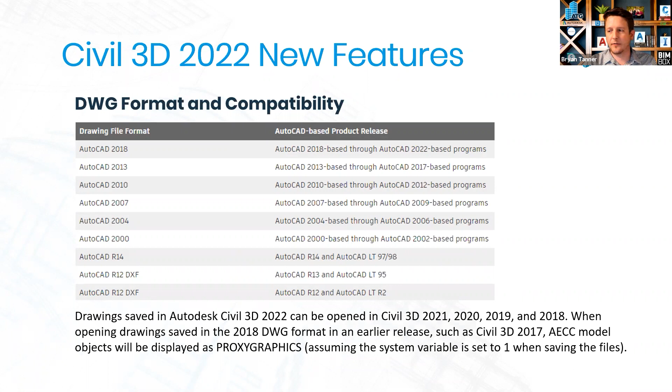We do have some additional sharing and collaboration options in 2022. I've already used this with a few clients, and it's not something that I expected to be a huge win, but it really is. I'm a big fan of the eTransmit tool to make sure that all of our reference objects, all of our CTB files, PC3 files, X references, custom line types, etc., are included with the drawing file that I send to a client or that they send to me.

Well, we have a new tool in Civil 3D 2022. Quite frankly, it's available to anybody on the 2022 platform for AutoCAD and any of the AutoCAD verticals such as Civil 3D, but it's the shared drawing option. The shared drawing option allows us to effectively create a web link for our drawing and set the permissions to that link to make it either a viewable drawing on the web version of AutoCAD Online or an editable drawing that can be downloaded and modified. So we have some permissions control and management over those links that we send to folks and their ability to either view or edit those drawing files.

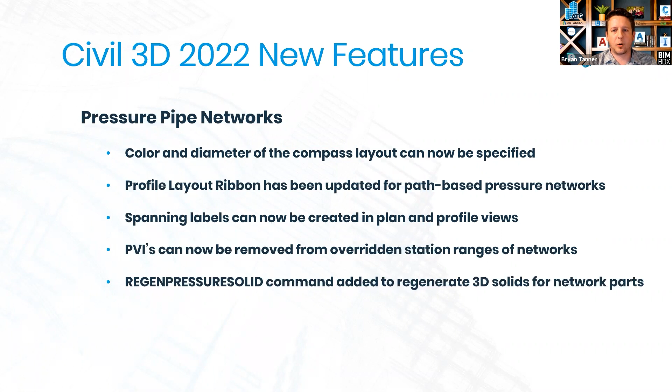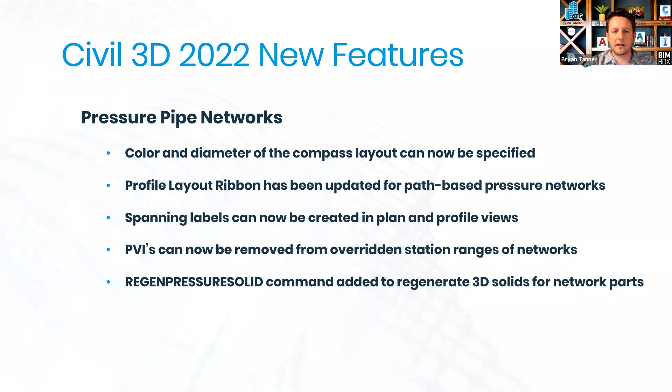And then if we needed to regenerate 3D solids, again, Autodesk is smart in knowing that we're not always going to use Civil 3D for everything that we do. We use other rendering tools. We may use other CAD packages for collaboration with other teams or sub-consultants. So we have a new command available to us for pressure pipe tools to regenerate the 3D solids that were created from those network parts.

ArcGIS workflows, raster data has been improved. ArcGIS can now be refreshed from within ArcGIS, meaning that if you have ArcGIS data connection layers inside of Civil 3D, since it's a live connection, if somebody's in ArcGIS desktop, they can update it from that location. It will refresh in your Map 3D, your Civil 3D environment.

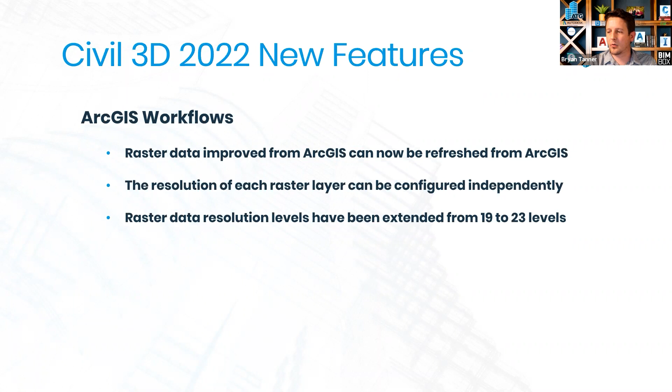Resolution of each raster layer can now be configured independently. It used to be that they were all at the same resolution simultaneously as you zoomed in, zoomed out, and set those layers. But we now have independent control of those and some additional layers of resolution that can be set as you zoom in and zoom out. I know those who work with very, very large models and comprehensive GIS data appreciate the added level of detail that they can create at closer zoom levels and the more minimalized level of detail as they zoom out across those sets of resolutions.

Dynamo for Civil 3D, this is an area that I've been getting pretty passionate about. Been doing a lot of research on and flexing the API calls and what we can do inside of Dynamo for Civil 3D. It used to have to be a separate install as part of Civil 3D, but now it is integrated. So when you install Civil 3D, it's not an extension, it's not a separate third program that you have to download and install. It is installed with Civil 3D. So all of your users are going to have access to it.

All of your users need to be aware of what to do and what not to do with Dynamo for Civil 3D. It's a great tool to flex and leverage the comprehensive programmatic abilities of. It can and will offset some of the things that we do with Lisp, negate what we've historically had to use .NET and Python for, and make it much easier for us to create those comprehensive programmatic experiences inside of Civil 3D, automating many of our processes.

But it now supports Python 3 as a default. So for those of us who do understand programming languages and do add some additional detail in our Python nodes within the Dynamo script, Python 3 is the default. That's important to know because the new version of this Python language, Python 3, is not compatible with the language structure of Python 2 and the variations of Python 2.

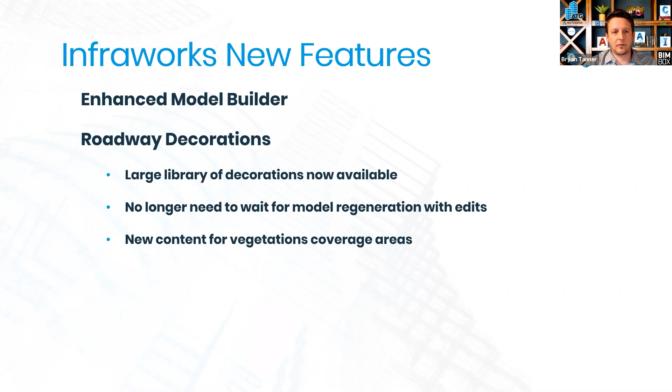So let's jump into a demonstration. We're about 20 minutes into our time together, and I tried to reserve as much of this as I could for looking at some of these tools. There's no way that we could get to all of them, but we're going to get to as many as we can. There we go. Okay, so first and foremost, we're going to look at our connected alignment and some of the new tools that are available there. Again, we're not going to get to everything, and I apologize for that.

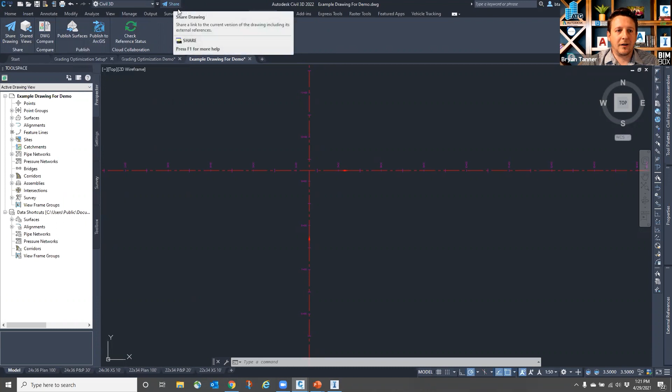Actually, I'm going to take one quick step back before we do the connected alignments. I did want to identify before I forgot the sharing tools. Right up next to our quick access bar, we do have a share button. Before in the slides, you saw where I went to the collaborate tab and we have the share drawing button there. But Autodesk thinks that this tool is so great and people are going to use it so frequently, they went ahead and put it next to the quick access bar. And I can't disagree with them. I think this is something that we are going to use fairly regularly. So having it prominently displayed is helpful.

If this drawing was something that I wanted to share with others that I'm collaborating with, again, this would be outside your organization. This would be outside of using our Autodesk BIM Collaborate, what we used to know as BIM 360. So if you're collaborating through there, great, keep doing what you're doing there. The DWG file format is now supported in BIM Collaborate Pro, and you're able to do some online web-based collaboration that way now compared to previous releases. So keep that in mind. You still have those tools available to you as well as some new features.

But for those who aren't on those specific collaboration tools as a file management, project management resource, we can share a drawing. It's going to generate a link, and you'll see once it loads my options that this link will actually update depending on whether I generate this as a view-only drawing or allow somebody to edit and save a copy of this drawing. So I can simply switch it to edit and save a copy, copy the link, drop it in an email, drop it in Slack or Zoom chat or whatever resource you're using to communicate with your clients or collaborators, and they'll be able to open this up in the web-based version of AutoCAD. Now, note that it's including those dependencies on the drawing, and also that the link expires within 7 days.

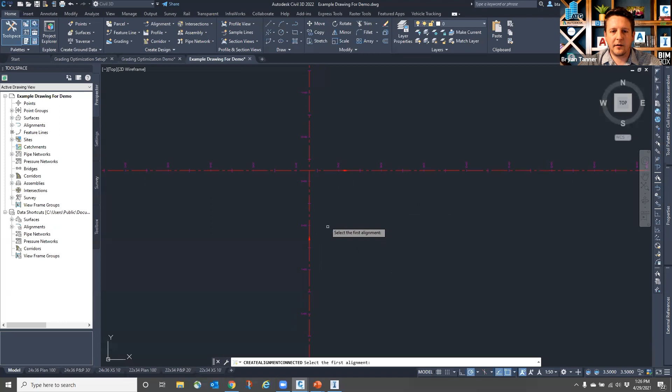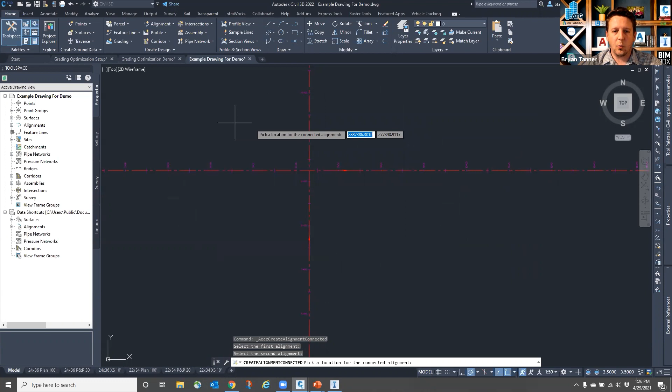So whenever I'm prompted at the command line to select my first alignment, if I am creating a ramp in the second quadrant or the southeast quadrant, I will want to select the direction of traffic that I'm wanting to support. So from my south to north line to my west to east line would be my exit ramp from the south to north line to east and west. And I will pick a location within that quadrant because again, Civil 3D doesn't assume where it's creating this connected alignment.

Now we get that preview area. I want to accept the current location and hit enter. And then I get to name that connected alignment. I'm just going to call this Southwest for the time being, Southwest slip.

I'm going to leave everything else really to the default on this page. It's just identifying the styles. We can talk about styles in any other webinar. Today's about features, not styles.

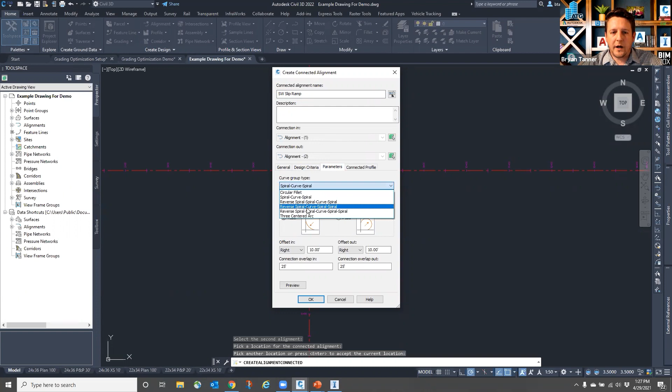Design criteria, again, same as what we've been used to inside of Civil 3D for a while, but parameters are where things have changed. So what is our grouping? We have some reverse spiral, curve spiral, and spiral, curve, spiral, some new groupings that just didn't exist before.

I'm going to use a basic spiral, curve, spiral in this particular instance. Please note that whenever we do the conversion later, we're going to end up with 3 centered arcs. But we'll use spiral, curve, spiral.

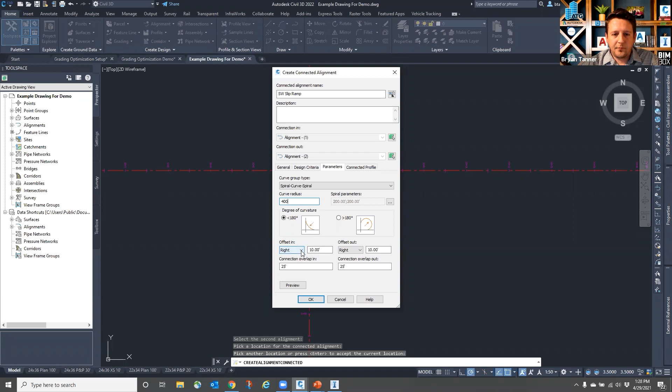I'll define the radius. Looks fine to me. I could easily expand it though if need be, because I'm going to use, again, a slip style exit ramp. Offset in, offset out, connection overlap. We'll run with that. So there's those offsets that didn't exist before for the slip lane, just to explore some of the tools that didn't exist before.

We do have, again, connected alignments that can be created, or actually I'm going to reverse the direction of that in a different quadrant. We're going to go from our west to east alignment to our south to north alignment.

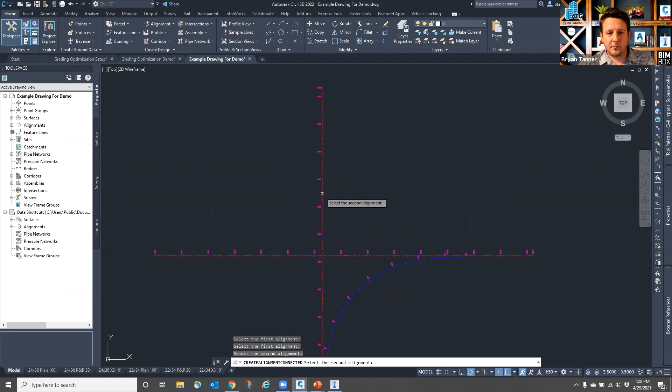Here, I must have clicked on a label instead. So first alignment, second alignment, picking the space, enter, and explore that one tool that didn't exist before, those greater than 180-degree curves included in the connected alignment options.

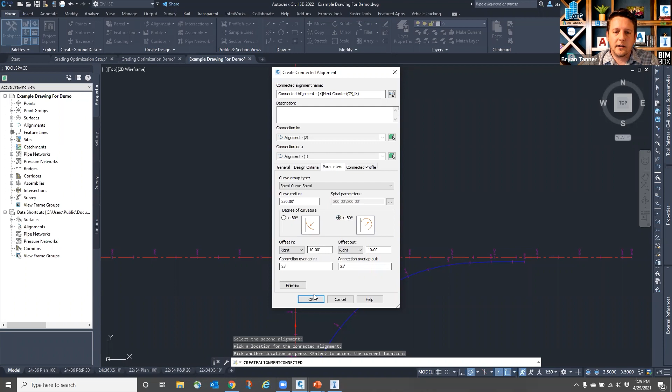Again, going to leave the defaults because this is the new feature, as this greater than 180-degree curve in the connected alignments, with the exception of I clearly should have set my offsets in the opposing direction. Could I make those changes? Absolutely. I could also manually make those changes.

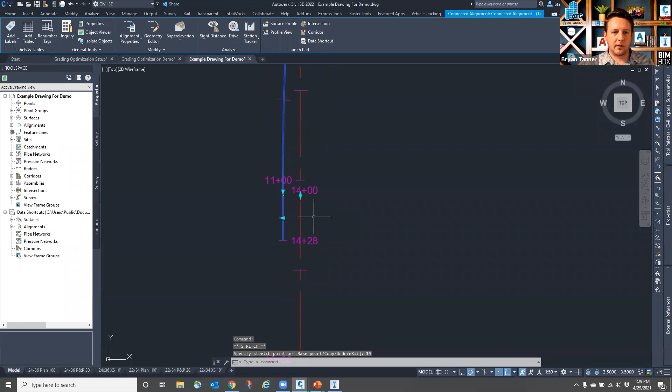I'm going to go negative 10 and just use my grip edits and some tracking to make sure that I end up with, oh, and I got to make sure that I'm opposing. So I've got my cloverleaf ramp effectively being started here.

So depending on how you're creating those connected alignments, we do have some new tools in that connected alignment dialog that didn't exist before. Now, if our curve group is not the appropriate type that was supported in 2020, 2021, or 2019 for that matter, I do need to go to the contextual ribbon, go to the modify dropdown, and use this convert to fixed tool.

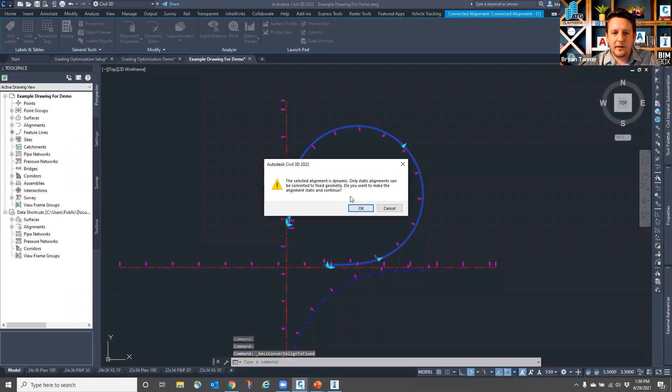That's what I mentioned earlier with the slides. It's going to convert that to fixed. It's no longer going to be dynamic. It will be static, okay.

And there we go. That was enough of a process to where it jogged my windows temporarily. But that is now a fixed alignment. We see that the grips have changed on it slightly. This is a necessary process though, for sharing this back out to folks on an earlier version.

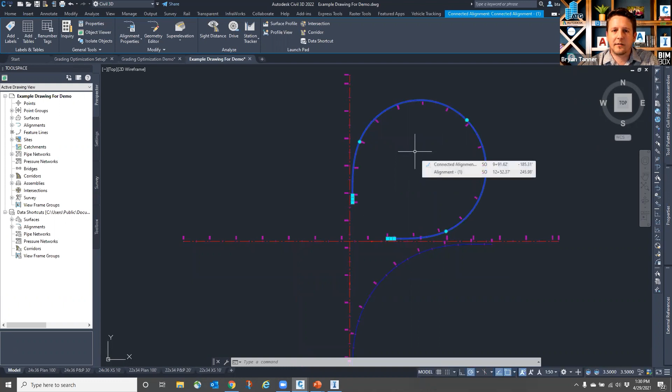So as much as I like this new feature and wouldn't hesitate to use it for internal production, we do need to be cognizant of who we are collaborating with and changes that need to be made in that last step. Like anything else with these contextual ribbons, yes, you can select the entity, and yes, you can go to the modify dropdown, or we can always go to the modify tab, select the object type, and we have convert to fixed from our more static or manually create manual contextual ribbon, if you will.

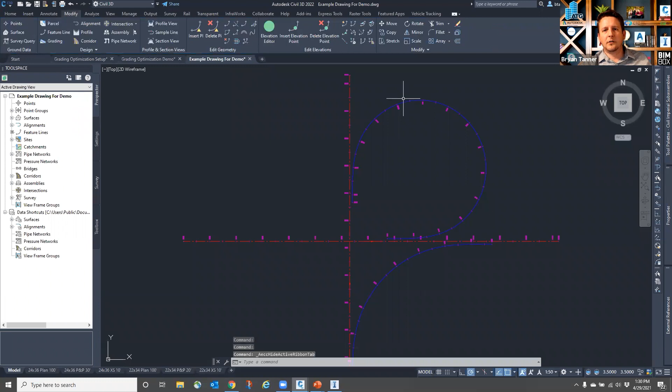So I'm going to close out of there. That's really all I'm going to cover with regard to the alignments. There's a lot of new features. I'm just going to keep moving on.

The one that's going to take us just a little bit to cover in more detail, because I'm not going to go into Project Explorer and heavily detail all of the separate pressure pipe tools. Project Explorer works the way Project Explorer did before. It just has access to additional object types that it did not have access to before.

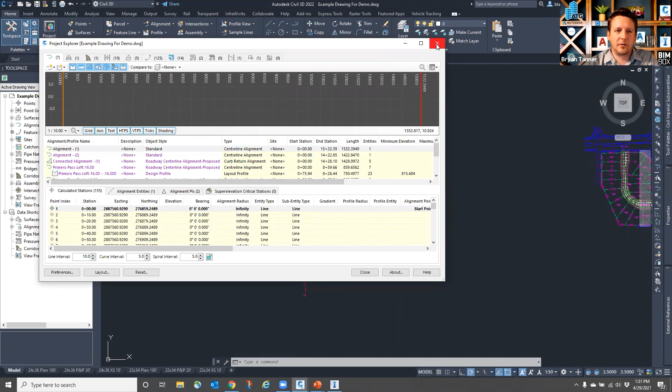So we're going to jump into another drawing. If you've joined our demos before or our webinars before, you're probably somewhat familiar with this data set, but it just so happens that this data set works somewhat well with the new grading optimization tool, and I didn't have to recreate the wheel for some example data to show off these new tools.

If you are using grading optimization, it is a separate download and install. So for those AEC and enterprise customers that have access to this tool, it does not get installed with Civil 3D. It is a separate download that you'll have to install. You can do that either directly through your AutoCAD or your Autodesk account through the web interface or through the desktop app, depending on which you have access to or your organization prefers to utilize.

It is available through either of those sources for our AEC collection and enterprise clients.

So what this drawing consists of right now is some very simple data. It happens to be that we are looking at polylines in this drawing. Now whenever we use grading optimization, it's going to convert those polylines to feature lines for us, but we just have general spaces, or what grading optimization calls zones.

Now once you download and install grading optimization, it's going to be on your Analyze tab of the ribbon over here to the far right. Grading optimization - very minimalistic approach to what tools are available here.

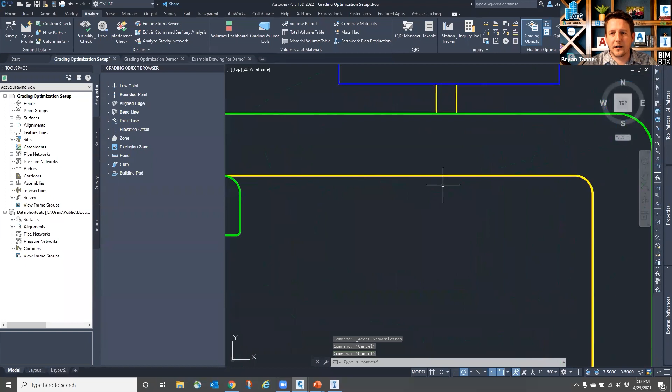First thing I'm going to select, I'm going to zoom in a little bit. This is our parking lot area represented by this pink line. I'm going to select that, go to my tool palette, and consider that to be a parking lot.

There is specifically a zone that we can customize however we want to, but the parking lot object is just a special type of zone. So I'm going to choose parking lot.

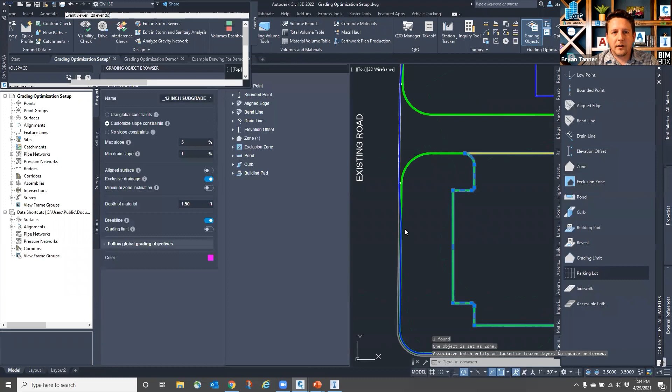I'm going to get rid of the event viewer really quick. I know some of us love it, some of us hate it. I generally don't like it as part of demonstrations, so I'm going to go to general event viewer and set that to no - so no more pop-ups while we're working with these tools.

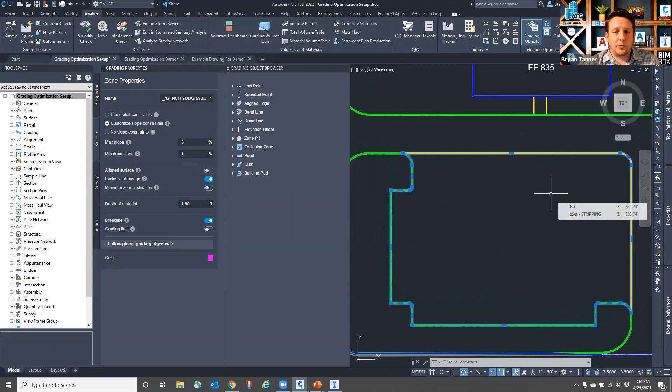So I've got my parking lot polyline selected. There's no depths, there's no elevations, there's no intelligence to this. I just have an existing surface and I have the horizontal representation of where my objects need to be.

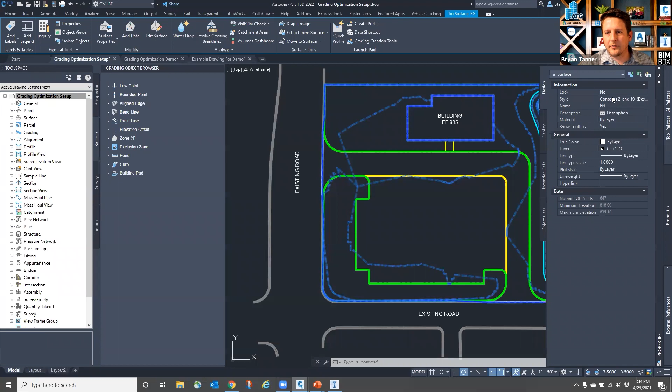As a matter of fact, I do have a design surface in here that is currently shown. This is a little bit of Food Network magic, but not a whole lot. I'm going to turn that FG surface to no display, and I'm going to go back and turn my EG surface to on, so that we can in fact see it.

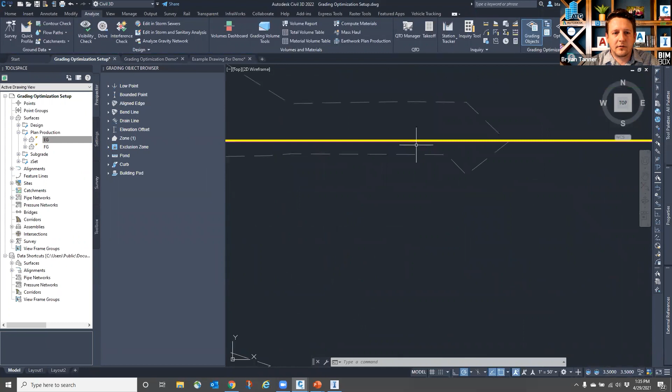Okay, so there's my existing surface. That's the only pieces of information that the grading optimizer is actually paying attention to - the areas that our polylines represent for those grading objects, and the existing surface that it's going to be converting and calculating the earthwork against.

So there's my zone that I created for that zone - there it is, max slope. I'm going to say I don't want my parking lot to be anything more than 3% and nothing less than 0.5%. I do want it to have exclusive drainage, so any drainage that's in the parking lot stays inside the parking lot.

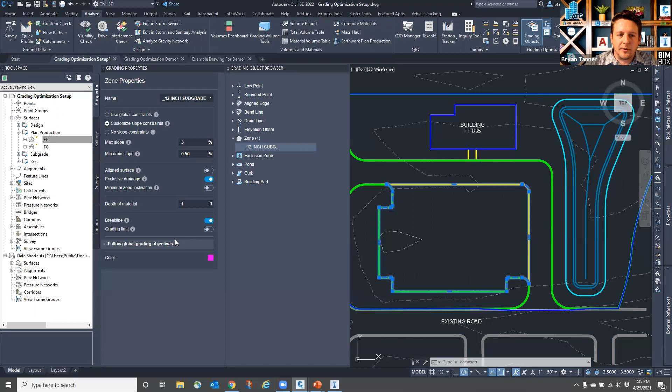And define a material depth and what have you. So I would hit escape to deselect that item, and then the zone properties goes away. So that object that was a polyline is now a polyline with extended data tied to it.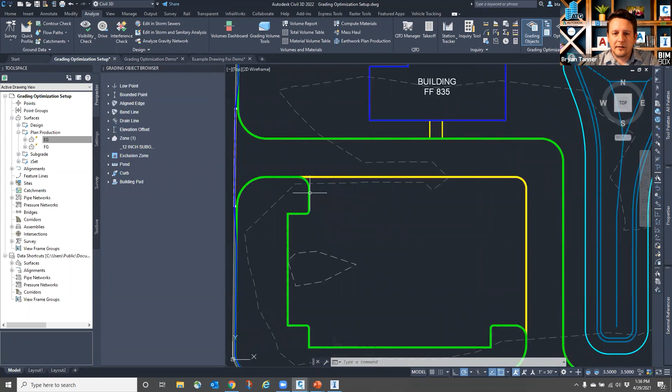Okay, so we haven't used the grading optimizer yet - we're just assigning extended data to our polyline reference objects. So I'm going to select - oh, I didn't mean to put a window around our pink line too - but here's our objects. We can only do this to one object at a time, one limit at a time.

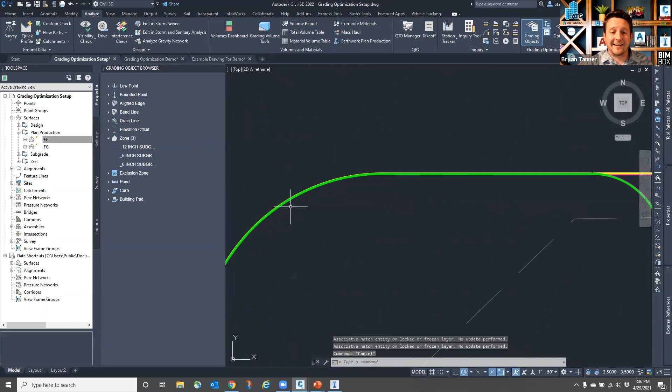So if I do select multiple polylines that represent the same type of material, and I set that up as a zone, it's not selecting anything until I hit escape, and then I pick back on it. It converted it to a zone, but whenever I select on it again, I'm only going to edit that one object independently of each other. So I can customize my grading controls - I can set it up with a specific grading criteria.

Within my swale area or just my grassy right-of-way area, I can define a much greater slope, maybe 8.3% within that area, with a minimum drainage of 2%, just so we don't get ponding.

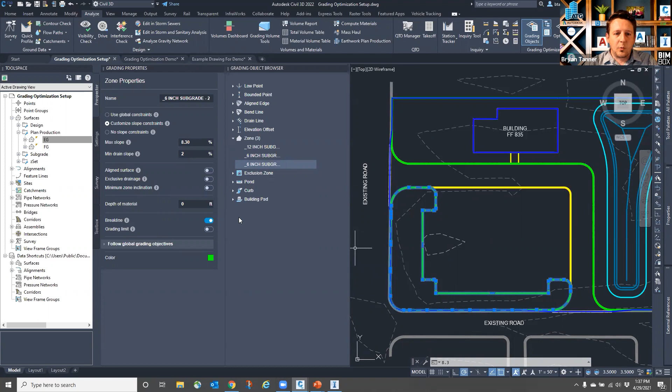So I can go through and set up all of these options within these sites. We have a building pad type. I can go to tool palettes and set up the building pad.

I have a separate pond that's internal to our grading limits, but I have a pond type that I can define based off of the top of slope of this pond, and I can determine whether it's a dry pond or a wet pond. Depending on that, we have permanent pool settings for those wet pond parameters as well.

But we can define what our storage is. A question came up on Tuesday when Autodesk had a webinar on whether the cubic foot setting could be used as a cubic yard setting for storage volume. At this time, that is not an option. So just to get ahead of any question related to that, right now we are limited to cubic feet for our calculation of storage, if that's a concern of anybody's.

But I can set what that storage needs to be. I'll say 60,000 cubic feet with a maximum depth of 6 feet. I do have the ability to set a safety bench and to determine what those values are for the depth, as well as freeboard and things of that nature as well.

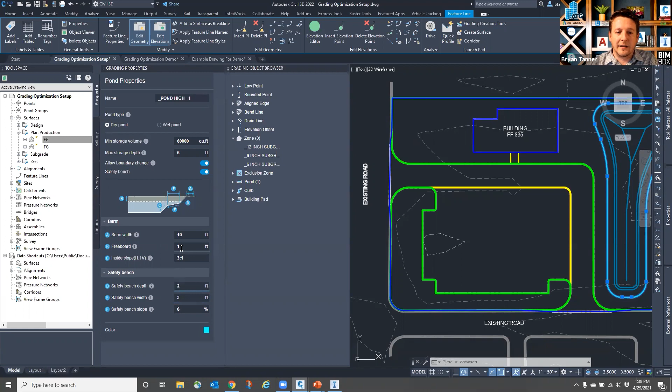So we get some exhaustive rules that we can define for the pond itself. I'm going to say the safety bench width needs to be 3 feet wide and no more than 2 feet deep, and again, that's 2 feet below the freeboard. Then those are the properties that are set for the pond.

We could go through and add curbs, we can add flow lines. Again, being conscious of time, I did preset some of that data into a separate file. No Food Network magic if I can manage, but I did not set my surfaces that I want to be displayed properly in this drawing. So I'm going to go back and set that again really quickly.

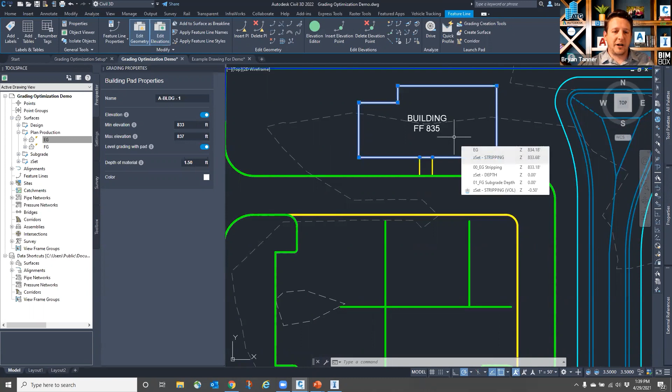Here's my existing surface. In this particular drawing, I'm just going to describe what I did rather than define all of those settings I used before. We have a building with a defined range of minimum and maximum finished floor elevation. This way, if it's possible to gain some benefit of the finished floor changing from the initial design to better engage and level out the entire site, we can do so.

I do have, we can set a sidewalk, I forgot to do that previously, but we've got coverage areas. We have drive areas, again, with different material depths and different minimum and maximum grading parameters.

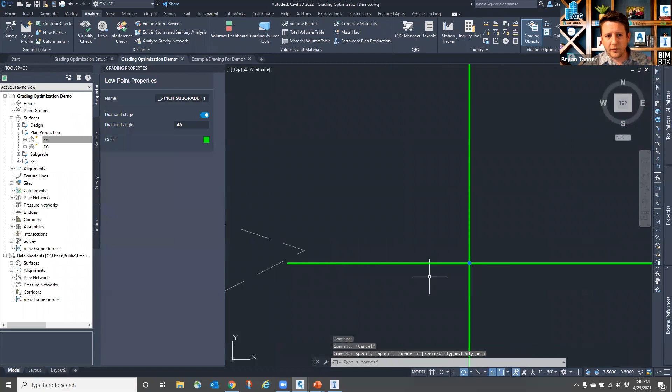I also have some flow lines with some low points that were defined. So I literally just put in an AutoCAD point at the intersection of these flow lines and defined it as a low point. Setting it as a low point, defining the shape of the contours that are ultimately going to be produced off of here, and the angle of that shape allows me to control how my contours are actually developed around those low points within a parking lot or within a ditch, as well as those same parameters I was showing you before with regard to the pond.

So a lot we could talk about this. Easily an entire hour could be dedicated to just the grading optimizer, but the key point is you're defining zones with grading criteria, zones within those, the entire limit of the grading, and then your specific features like your flow line, your low points, and maybe building pads and things of that nature.

Once you are set with the zones that you think you need, and it may change, but the zones that you think you need, within that same Analyze tab, we'll go to Optimize. We'll be prompted to select the existing grade surface that we are comparing against, and the Grading Optimize window comes up on our screen.

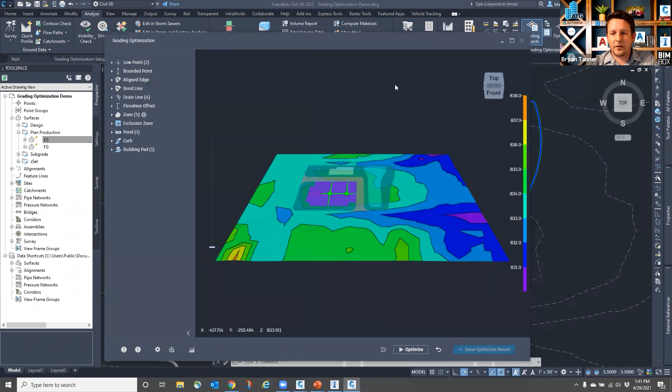So within grading optimization, again, we started out with an existing surface and plan view flat polyline geometry. We get kind of a preview of the different material depths and object types within our grading optimization window here. So we're identifying where a pond will be, a building pad will be, a parking lot, the drive, just the overall kind of site stripping area for our sod work and our low points.

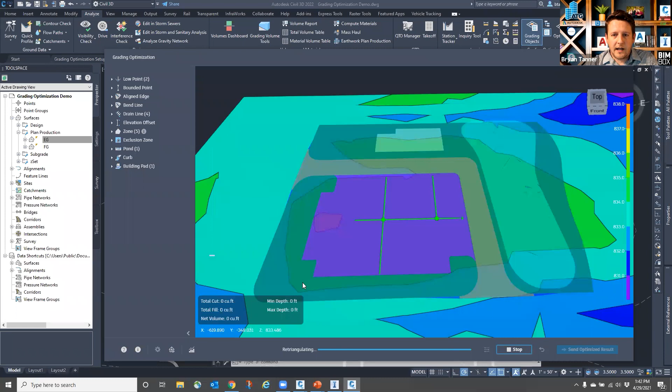That's what we see. They're not CAD objects, they're visualizations of model entities. Now, we can start to optimize at any point in time. And as we optimize, it's going to retriangulate and reprocess everything. And it's going to continue to work and work and work depending on what your CPU and GPU and your RAM and hard drive are all capable of; that is going to determine how fast it can optimize this surface.

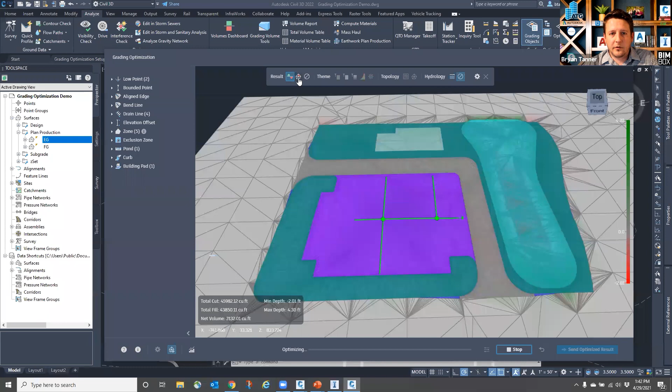I'm going to turn on our visual modes to where we can see where our cuts and fills are, our clashes. So the red triangles represent the areas of our model that do not yet conform to the parameters that we defined. I can set it to none and we can just visually see how the contours are changing as Optimizer is running.

And while you probably can't hear it on your side, this is utilizing a considerable amount of hardware resources, as you might imagine. There are millions of calculations running simultaneously right now to produce this optimization. But if you are leaving for lunch or leaving for the evening, it would be an ideal time to set this up and let it run for a little bit while you're gone.

It can be quick. You can stop at any point in time. And if you're satisfied with the results, it will allow us to send that optimized result at whatever state it's in back to Civil 3D as our, quote unquote, complete framework of feature lines.

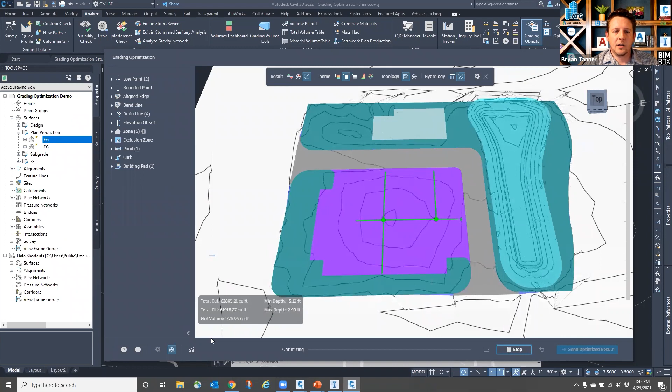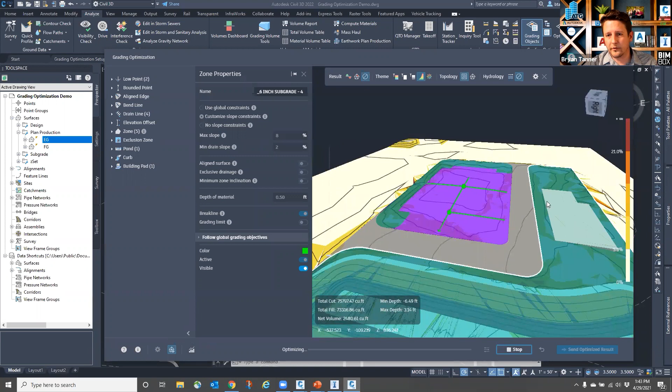Now, we have another tool that we can use. Well, actually, we can use several other visualization tools to see how this impacts our topology and our cut and fill and hydrology. But the one thing aside from visualization that I want you to key in on is our ability to select items that we don't think are adhering to rules. In this case, the building pad. And the controls in here are very familiar for those who are using InfraWorks. So think InfraWorks controls when working in grading optimization.

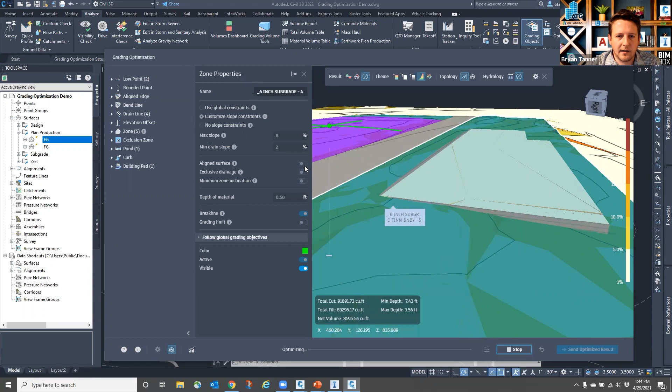Our building pad is not level with the surrounding ground surface. I can change that in here to ensure that it is aligned with my surface. So we have some custom controls that we can apply to allow this to update those new rules. Okay, so we do have the ability to make some minor edits to the rules that are applied to these grading elements, but it's going to continue to run.

And if you want to know how efficient your surface is compared to what you might be trying to do independent of grading optimization, we have convergence plots. So we can see how the overall smoothness, volume, and feasibility of a project is changing over the course of this calculation. The simpler the site, the quicker these calculations run, but also the simpler the site, the easier it probably is for you to make those changes independent of this tool.

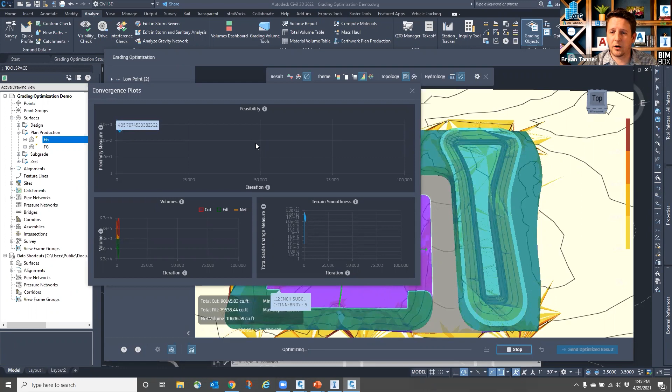So this tool really could be leveraged to great effect on larger sites with multiple components that add a lot of complexity to the incremental changes that you would otherwise have to manually make. Maybe you have 10 building pads, 3 different zones of parking lot, curb and gutter, ADA ramps. We can account for sidewalks and things of that nature, which I did not do in my kind of pre-baked drawing for the sake of time.

But at any point in time, I can say stop. It's optimized enough for me. Send optimized result back to Civil 3D. And I have the option of creating a new surface. I'm just going to call it new from optimization. Define the style that's being used in Civil 3D for that new one. It's probably not going to be pretty because I stopped it fairly early.

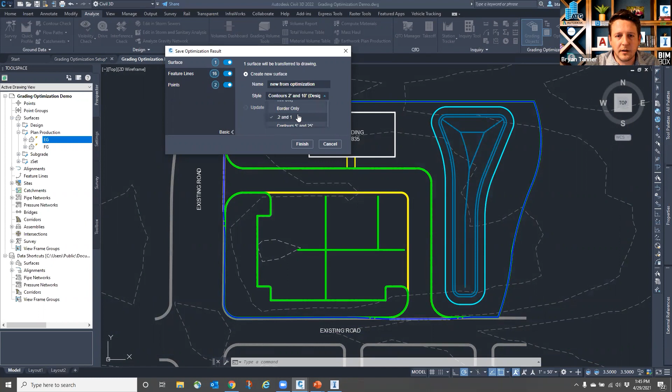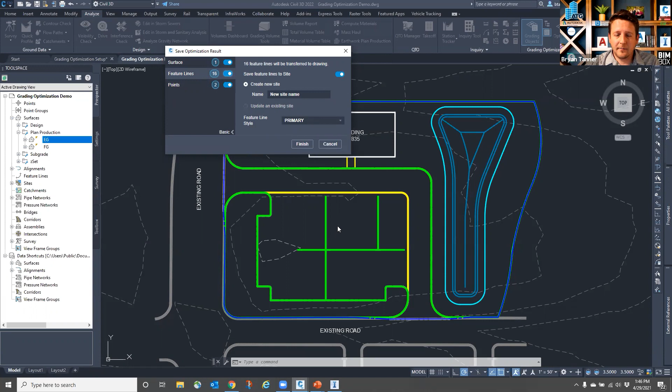Let me change to a smaller one. I'm just going to go with 2 and 1. It's probably not going to look pretty with such small contours, but I am going to add the feature lines back in. We don't have to. It can just be a surface by itself, but I'm going to add the feature lines that were created by grading optimization back into Civil 3D, because the benefit is once those feature lines are back in Civil 3D, they're available, and we can manually tweak and edit them to our heart's content. So we're going to get a new proposed surface.

Again, whether it's pretty or not, I can't validate live without having let grading optimization run to the full extent, but it is a nice tool. It is processing in the background, and it is adding in those feature lines. I may let it run for just a quick second. My fan is still going like a jet in the background right now, whether or not you can hear it.

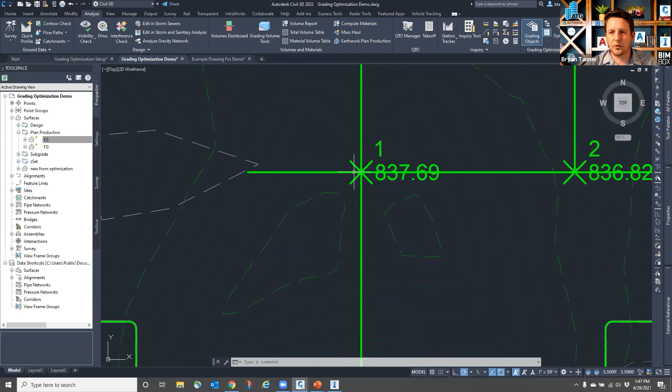But I'm going to let that run for another moment before we switch over to InfraWorks to close out for the day. Again, there are some more features that I couldn't have possibly covered inside the new tools in Civil 3D. So right off the bat, I know that my low points have not been optimized yet to converge on where my actual low point of the surface is yet. Our contouring is not as complete as I'd like it to be, okay?

So we've got some more tools, and actually I never set a grading limit. So it graded for the entire existing surface. And of course, the proposed contours match the existing contours where I did not define any grading criteria. So two steps that I should have taken before jumping into grading optimization. One was adding in my sidewalk. Another was making sure I had a grading limit.

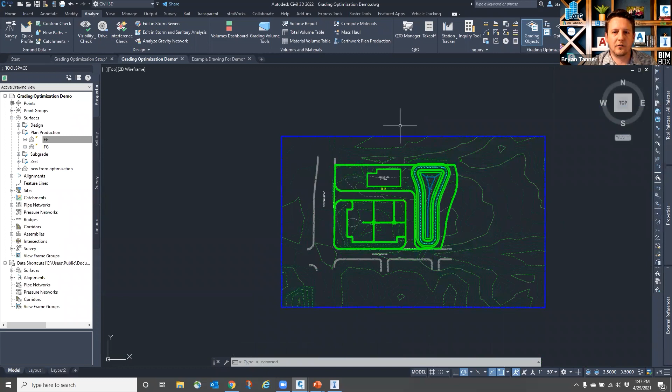Again, that was one of the tools that we had available in here, grading limit, but I did not define it beforehand. And then I could have let grading optimization run for a while longer in the background. Again, the more complex and the larger the drawing, and depending on the limitations of your hardware, this is not a cloud service. This is using your computer's hardware, will determine how long the optimization actually runs to completion.

But again, at any point in time, you can stop it, bring the model data back into Civil 3D, select those feature lines, and modify them to your heart's content. It is just a Civil 3D feature line that we have full control over after it's been inserted back in.

Jennifer asked the question, does it eventually stop running when it thinks it's complete? Yes, there is a point of completion. I will say that I let this run on a different example yesterday evening for about 3 hours and it wasn't done yet. It was a similar size area, but even after 3 hours, it wasn't done.

That's where I say walk away for lunch or leave it running whenever you are done for the day at work. Save it before you leave because like anything else, system-wise, server-wise, otherwise, your best bet is to always save your drawing before you walk away for an extended period of time. But let it run for a few hours. The longer you let it run, the more ideal the design is going to be.

It may look funky from time to time. You may get random spikes as it's calculating all variables, but it will always resolve those and flatten out the earthwork to a more realistic and highly advantageous design as far as the earthwork balances and where the earthwork's moving from. It's not just overall cut and fill, it's mass haul. Where's the earth coming from and moving to, to minimize the overall cost of construction.

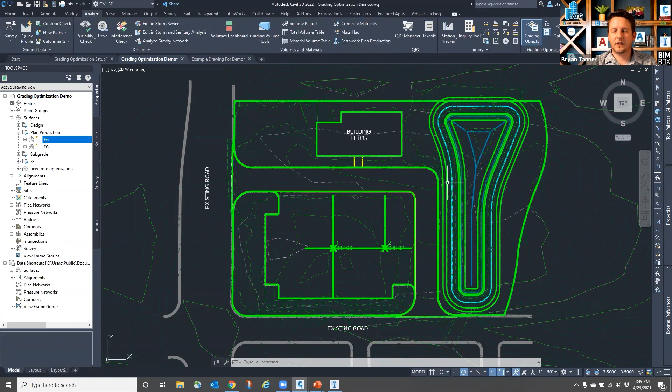Okay, so we do have that proposed surface in here. That's the extent of what I was planning on showing with these tools in Civil 3D today. Be happy to answer any questions that you have as we move forward, but we're nearing 10 minutes or so left of our kind of programmed time together. So I'm jumping over into InfraWorks.

This is just a general highway in northern Indiana, let's call it that. If you're familiar with our region in the state, you might start to pick up on where this is in the world, but that's okay. It's a generic interchange, and that's all we really care about. And it really could be an urban street. It could be a ditch for all I care. We can use some new tools in InfraWorks that were previously unavailable to us and work, in my opinion, much better than what was previously available to us.

The first thing, and I mentioned this in the slides, is our roadway decorations. So first things first, this came from a model. So I let InfraWorks develop this model. And that means that all my roads in here are modeled roads. They are not component roads.

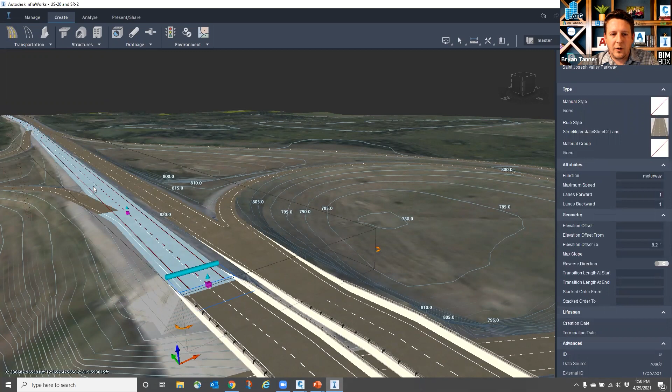So the tools that I'm talking about with relationship to roadway decorations do require that our road itself is converted to a component road. So I'm going to select my road, right click, and convert it to a component road. I'm always going to get the warning that it basically changes how the entire database structures the component road compared to where it was before.

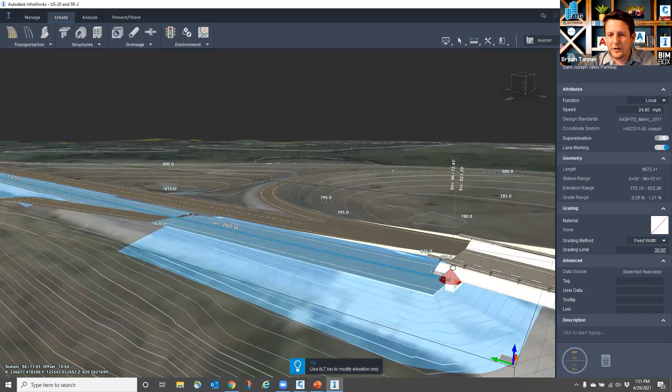Also, whenever we remove it from the model, we do sometimes have to make vertical adjustments to our modeled objects to realign them with some of the modeled geometry that came from our project model. So a couple caveats there whenever we switch to a component road,

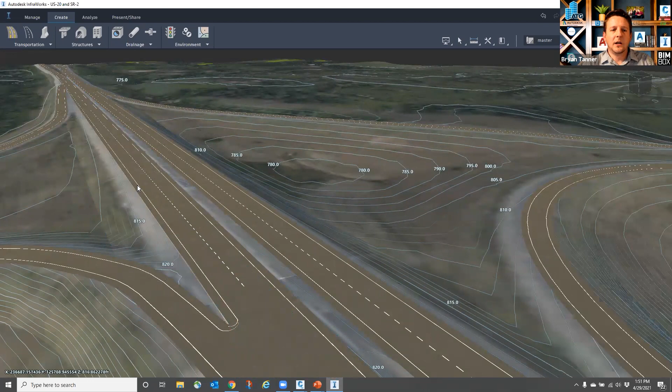but oftentimes we're using these tools for design roads anyway. They're already component roads, whether you're designing them from scratch inside of InfraWorks or they're a connected model coming from Civil 3D. In either case though, now that it's a component road, regardless of how it became a component road, we have the ability to add in roadway decorations as an independent object now.

So if I right click, I have place decorations. Place decorations allows a selection of a fairly large library of available ones. It's limited right now because whenever I was trialing this the last time a few days ago, I looked at rail. But maybe it's some kind of a guard rail or divider or concrete structure that you're trying to place along the edge. I'm just going to use a kind of a common Guardrail 3.

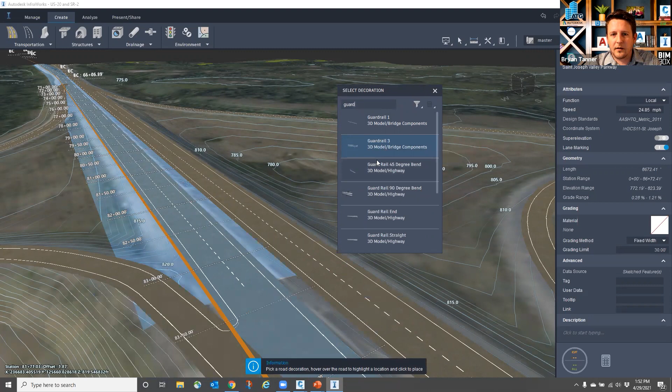And you're going to be prompted for what linear location of your road this guardrail is actually going to be placed. I'm going to place it to the outside edge of my shoulder. It's going to run along the entire length of this component road. It does recognize that you do have intersections, so that is one added benefit. It will recognize some obstructions at those on and off ramps, as we can see here.

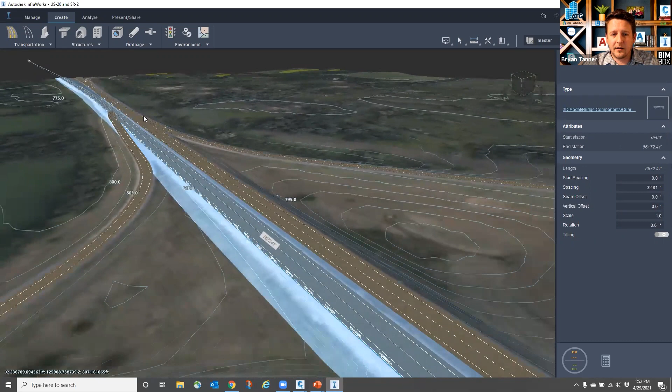So if you did have a guardrail that needed to run the full extent of the alignment, you can probably just leave it at the defaults, but we do have stationing control. I can physically shift the limits of this guardrail and that object updates independently inside the components. Let's pivot around a little bit.

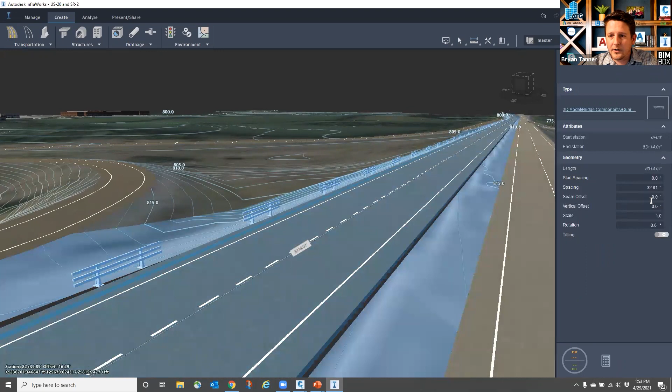Because they're independent objects, we can independently control the spacing. So this thrie guardrail I can change the spacing out. I think this is going to be somewhere around 10 feet, maybe even a little bit tighter. 10 feet is good enough, even if there's just a slight overlap, maybe 13. That looks pretty good. You'll note that it doesn't really have a clean transition from each instance.

I can change to a tilting mode. Tilting mode will heal any vertical difference in here. Note that the change hasn't happened yet. I was given a tip. It just went away, but I was given a tip at the bottom of my screen that if I just click away or hit escape, that model component is going to rebuild.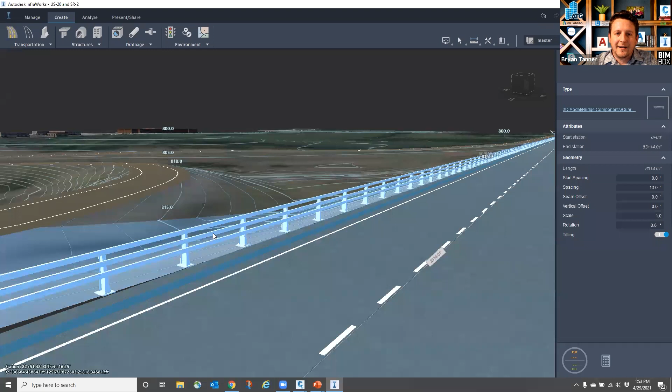So previously, whenever we did roadway decorations, it required us to regenerate the entire roadway that that decoration was based off of. Now it's live. It updates automatically just by clicking away in the screen. Now, if our guardrail is too tight to the shoulder, we still have those independent offsets and spacing to where we can change where it's located along the seam.

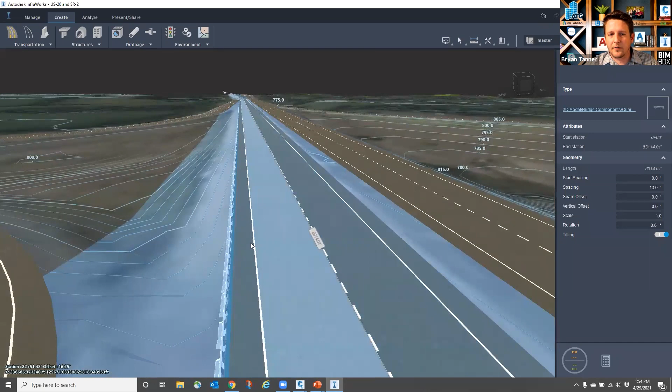And just like anything else in InfraWorks, I can quickly repeat this on the other side of the road or the adjacent road on the other side of the divided highway for that matter. So that's some of the neat functionality that came along with this latest version of InfraWorks. The one thing I will say is if I created this decoration on the other side, and I've got to make sure I actually pick the roadway alignment entity for placing decorations, it may be placed backwards.

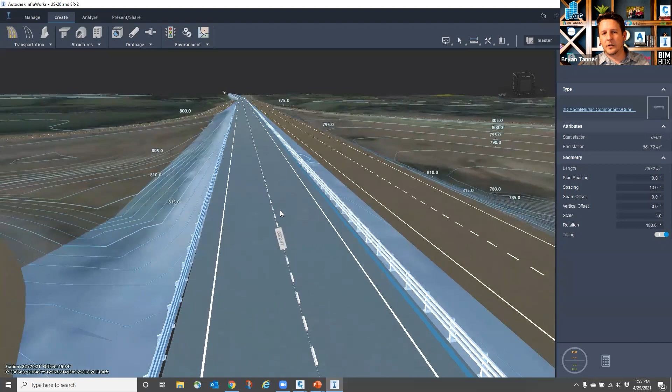Yeah, that's what I was expecting, that roadway decoration component for that guardrail is backwards. I can change the rotation of it 180 degrees, and it's effectively the same settings as I used before. Change my spacing, allow for tilting for a clean transition between all of those along the vertical change within the drawing. And now we have guardrails on both sides of the road. So decorations greatly enhanced in recent versions.

What about those highway departments, or for that matter, park departments who want to see a lot of vegetation in our open spaces now? We know the benefits of infiltration. We know the benefits of trees in open spaces and their benefits to the environment and people and behavior and slowing down traffic in places along roadways.

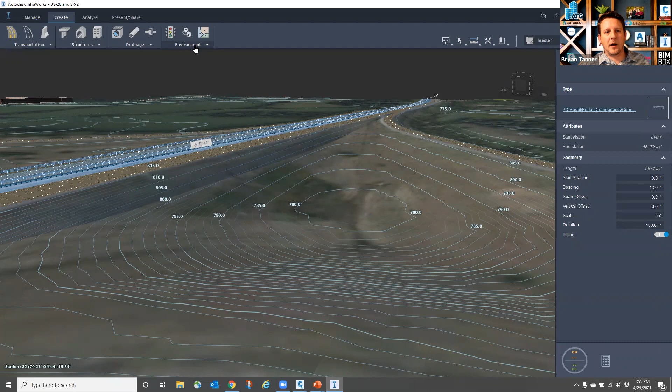So we have some components that we can create from our environment dropdown on the create tab of InfraWorks now. We can create rows of trees. That's not entirely different than what we were used to before. I just searched to filter down the types of trees that I am placing.

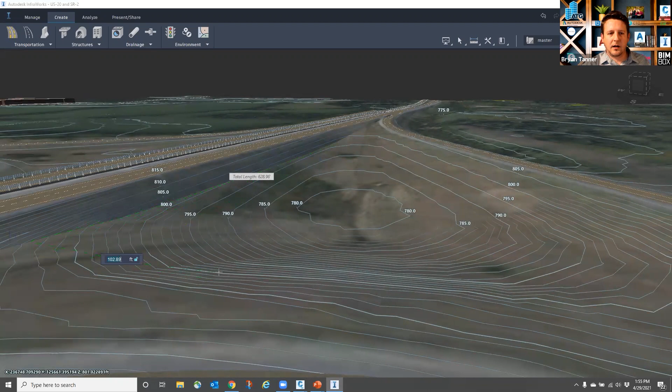Again, this is just the default library, nothing special about this, but I could place a row of trees along the ditch line, hit enter, and develop my row of trees if I wanted to. Instead of a row of trees though, because that's not entirely different than what we had before, I want to place a stand of trees.

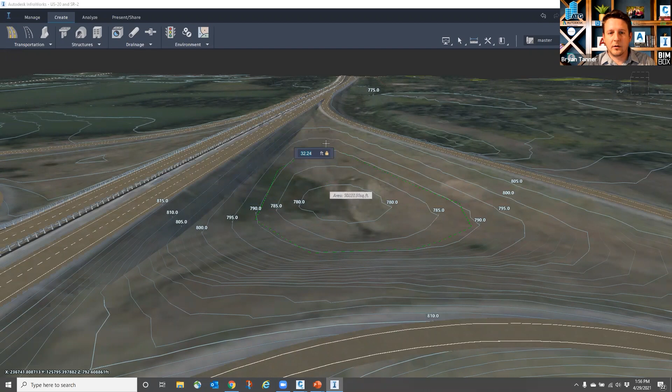So I'm going to place just a stand of beech trees into what would otherwise be considered more of a coverage area at the general low point of this interchange, and hit enter whenever I'm done. There we go, double click. There's my stand of trees.

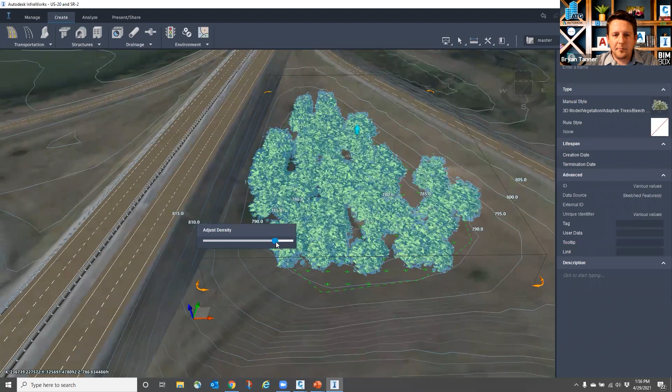I can obviously change some of the tag data, but one of the less obvious aspects of this is whenever we hit escape, this is all one object. Notice the bounding box for the entire stand of trees. We can move it, we can manipulate it, but the entire bounding box can be changed to the level of density that we want that set of trees to be displayed. So again, it's the entire object itself that is a stand of trees.

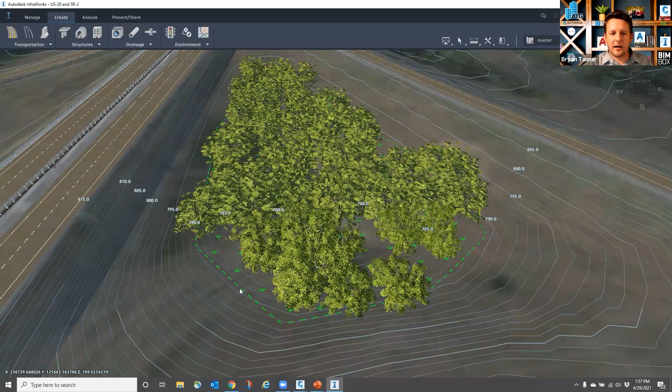It becomes a little bit more difficult to select after the fact. There we go. And I can adjust my density down. So we have that new feature. It doesn't have to be trees. It could be different types of vegetation that you have wherever you're at in the world. You know, scrubby grass, dandelions. It could just be a tall stand of weeds for that matter.

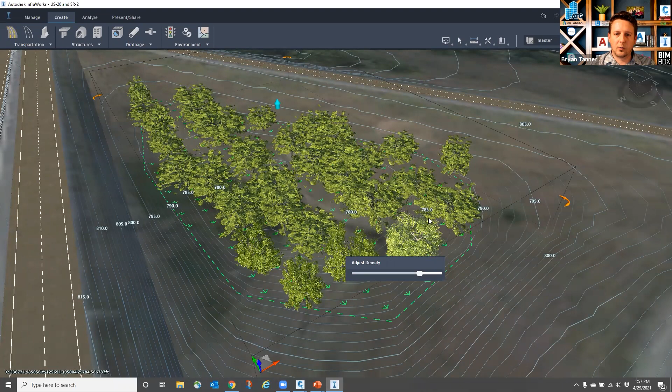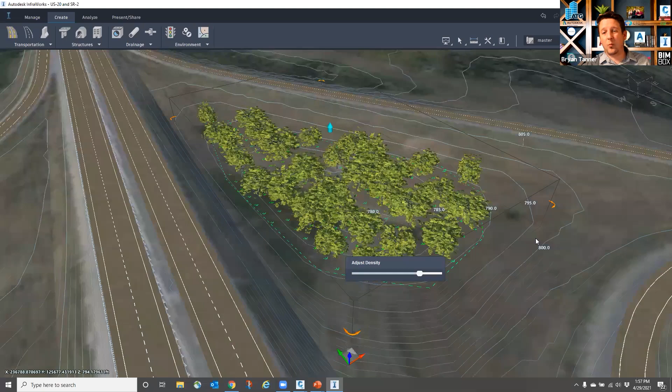But any model entity that we have in our decorations for environmental placement can be added to a new stand. So that's a new feature within InfraWorks besides the decorations for the roadway and how they're independently controlled, as well as the enhanced model builder tools. Again, an hour is a tight amount of time to talk about all these new features, and we didn't cover but just that one new share feature for AutoCAD. There's a lot of new features inside of AutoCAD that I think are valid justifications for moving to 2022 releases.

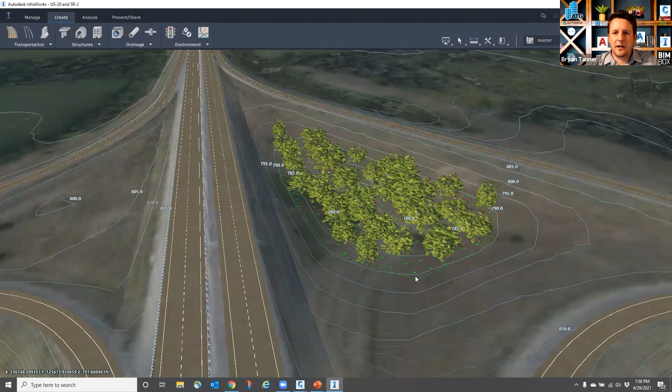I know there's hesitation to jump into the brand new release as soon as it's available, but I would encourage you to start testing out. I think you're going to find some value, especially with the new count command and a new count palette that allows us to do much quicker object quantity extraction and tabular editing. There's a new field type for our counted objects that can be embedded in tables. It doesn't necessarily replace everything that we do in Civil 3D. Civil 3D is great, but I encourage you to explore some of the new features that are in just regular vanilla AutoCAD as well. So that said, that's it for the demonstration today.